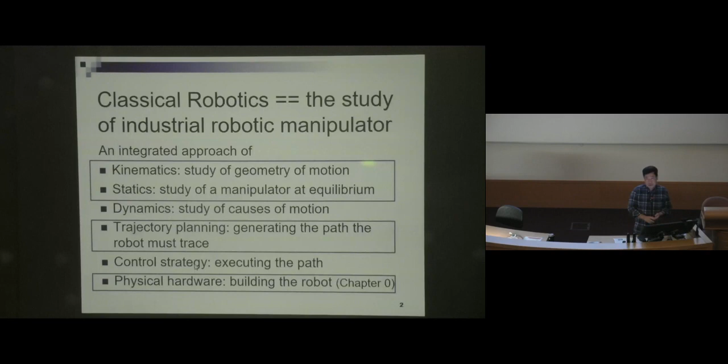So advanced robotics is essentially a theoretical analytic course, so I'm expecting you guys to have some background knowledge. Previously we expected students to have taken linear systems, but we don't think that's necessary since not everything covered there is applicable here. But you should be comfortable with linear algebra.

On our first lecture I have some slides going through a quick review of linear algebra, and there's also a PDF called Linear Algebra Review that covers some of it. You should be comfortable with linear algebra, and by now everybody should have gone through slides 66 to 76 of chapter 0, as well as the linear algebra review.

You should know trigonometry - the cosine rule, sine, cosine, and all that stuff. You should know it. We have this Trigonometry Identity PDF - it's just one sheet of paper, so it doesn't actually require you to know that many identities.

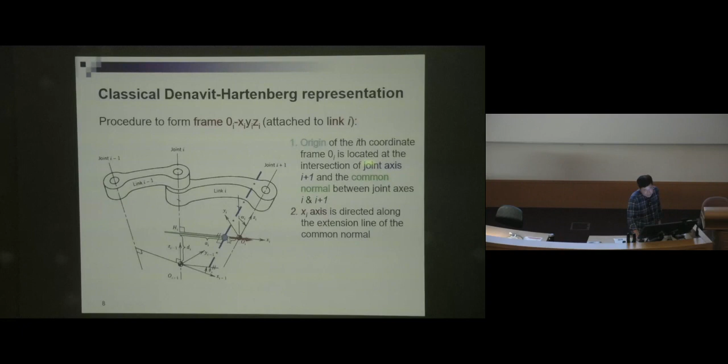And then after that, you need to determine the XI axis. The XI axis is directed along the extension line of the common normal. So this is the extension line of the common normal, so you have your XI. And then after that, you have your ZI. This is what is described as the classical DH representation.

So when you have the XI and ZI, you can find the YI because of the right-hand coordinate system. The Y-axis is chosen such that they form a right-hand coordinate frame. So from X to Y, you will have your Z being pointed out in this manner. So you attach the frame.

Then after that, there are essentially 4 parameters to determine the relative location of the frame. You have the angle between the XI minus 1 axis and the common normal, HI OI, measured about the ZI minus 1 axis using the right-hand rule — this is your theta I. Then you have the distance between the origin OI minus 1 and point HI. Then you have the length of the common normal. And finally, you have alpha I, which is the angle between joint axis I and the Z axis, measured using the right-hand rule. So you have these 4 parameters.

So if I'm to summarize this into a set of rules, I'll illustrate it using an example. I'll take out this nice drawing of the link, and we'll only look at the skeleton. So this is frame OI minus 1, this is frame OI, and you can actually see that there's an intermediate frame over here.

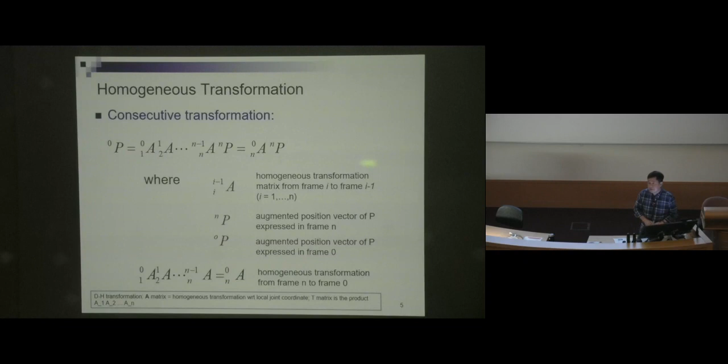Why do we have this modified DH parameter? What's the difference? Is any one better than the others? How does it work? The notation is also different.

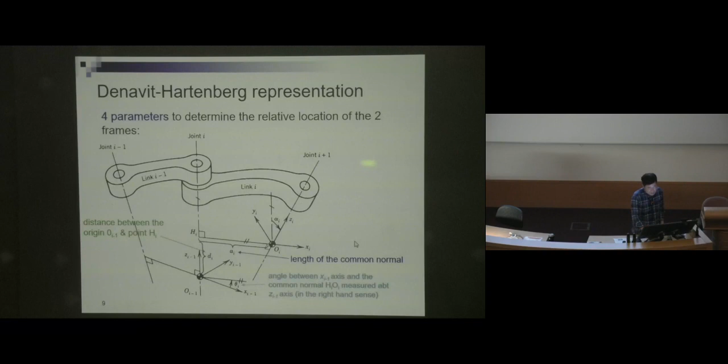For the modified DH notation, it basically goes from your link I to link I minus 1 to link I plus 1. So it's a variant of the classical DH notation. To say which one is better, which one is...

not as good, I guess both have advantages and disadvantages. Classical DH notation will be better if you're actually doing the classical analysis. So this is why you should know both.

Besides the classical DH notation and modified DH notation, there are other variants of the DH representation as well.

I thought it's more like two systems, but which one is more commonly used than the modified DH? So which one is more commonly used today? Both are equally used. Thank you for that. Yeah, both are equally commonly used.

So of course, the textbook is actually pretty popular, so modified DH notation is actually being taught in undergrad robotics class more. The classical DH notation is more for advanced classes, because in advanced classes we also tend to fall back to more analytical analysis.

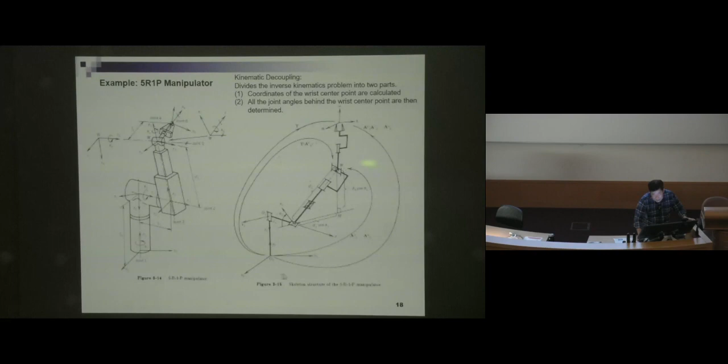We've gone through this in class with a different example. So we identify a wrist, and find the coordinates of the wrist center point. You calculate from here to here. Then after that, you find all the joint angles behind the wrist center point, meaning you take this as a center, use it to determine this, and then determine this. So we break them into two problems and isolate them, rather than isolating all 6 degrees of freedom altogether.

So the kinematic decoupling is easier. It simplifies the problem, but it doesn't apply to all the manipulator.

Okay. Sorry? This is for you to find out. Yeah.

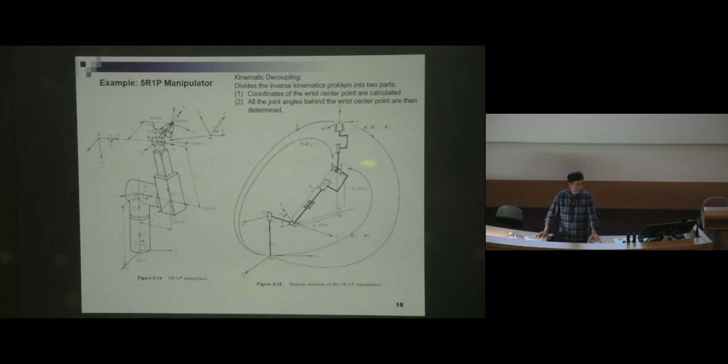Okay, so after that, after we go through the inverse kinematics, we went on to study the differential. And the main thing, one important thing we actually need to know is the manipulator Jacobian. So the manipulator Jacobian, we have gone beyond looking at the position and orientation of the end effector and the joint. We want to study the relationship of the velocity, the velocity at the end effector with the velocity at the joint.

So same thing, you have to start from the forward kinematics. And then we actually derive that when we compute this manipulator Jacobian, we actually assume a very small movement. So this is the infinitesimal end effector translation and the infinitesimal end effector rotation. So you have your dP equal to dXe, d phi e.

So you can write this as P dot equal to Ve, omega E. This refers to the end effector, the end effector velocity. And then the Q dot over here is actually referring to your joint velocity. So you have your Q1 dot, Q2 dot, up to Qn dot, every one representing one single joint, the velocity of one single joint. So the manipulator Jacobian will actually link the P dot equal to J Q dot.

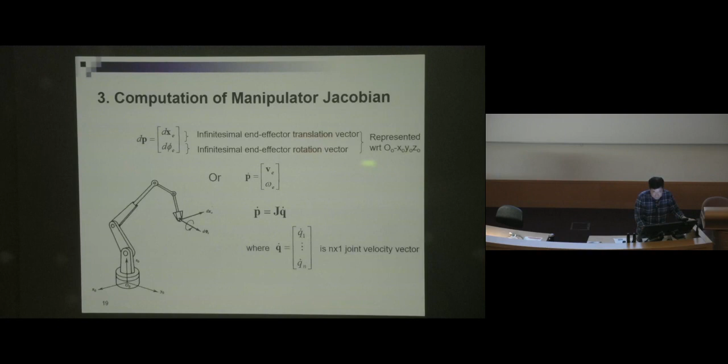So what does this manipulator Jacobian actually contribute, what does it actually comprise of? So the manipulator Jacobian will comprise of 3 rows representing the JLi, and 3 rows representing, the bottom 3 rows representing JAi. And every column itself is representing one single joint. So meaning that you have 6 by n, the Jacobian matrix is a 6 by n matrix.

And then if the joint happens to be a prismatic joint, the JLi, JAi will be equal to Bi minus 1, 0. It's a prismatic joint, so there will not be any rotation, you don't have any torque. And then if it happens to be a revolute joint, your JLi will be equal to Bi minus 1 cross Ri minus 1 E, and the JAi is equal to Bi minus 1.

So bear in mind that the Jacobian is configuration dependent, so the configuration of the robot actually plays a part. You look at, we continue with the RR manipulator.

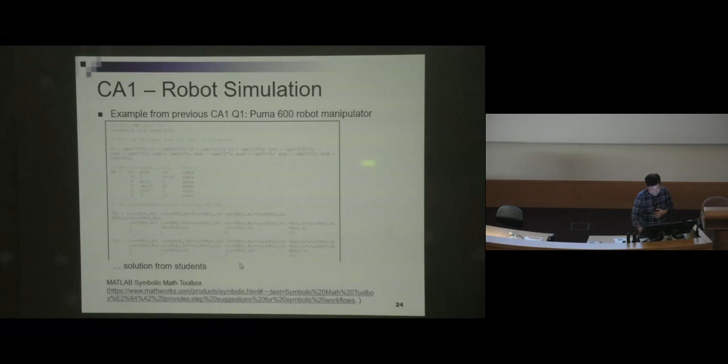This is actually a practice of what you have learned. You can actually read up on the symbolic math toolbox from here. The toolbox is actually available to you.

And then come the inverse kinematics. You need to do the inverse kinematics as well. So the inverse kinematic, you will start from the home position of the robot. You should know what is the home position of the robot, meaning that is the start position of the robot. Your question already gives you the start position of the robot.

And then you specify the point to reach. So in this case, the student specified this point to reach, and then this is the transformation matrix 0T6 to reach that particular point.

And then with that same thing, obviously you can see from this robot that you can actually consider a wrist, so you can actually perform the decoupling. So the student does the decoupling, solves the set of mathematics, and then determines all the joint angles.

So you need to do that. The previous CA also has a question three.

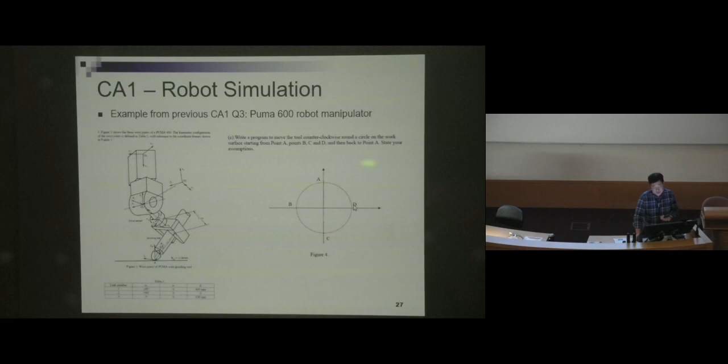So same thing — if you want to draw a circle, you probably need some waypoints, so you have your A, B, C, and D. For every point, you need to determine using the inverse kinematics. After you have determined the inverse kinematics of this point, you need to generate the trajectory to link them up together. Bear in mind that you actually need to reach the point and coordinate the motions.

So this is what the student did — they identified the coordinates of A, B, C, and D, performed the inverse kinematics for every point, and then generated the trajectory between the points. We'll talk about how the trajectory can be generated in a later part of this class.

So today is the last class, so I have to finish all these things. If I'm going too fast, please let me know.

So this is the result of the student. They specified the four points and tried to draw the circle, but it doesn't really work — it's not really a horizontal circle, so there are some problems here and there. It's actually because of the configuration of the robot, since it's fixed on the ceiling, and the ground itself has a certain length, a certain height, so it places a certain constraint.

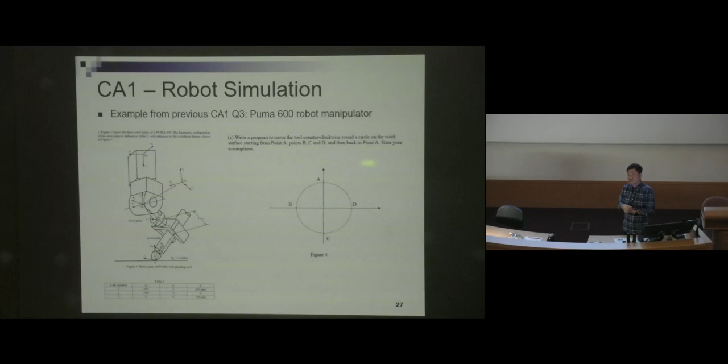So in your case, you shouldn't have this problem. You should draw the four letters, and do a plot like that. You should also plot the velocity, the angle — so this is the angle of joint one.

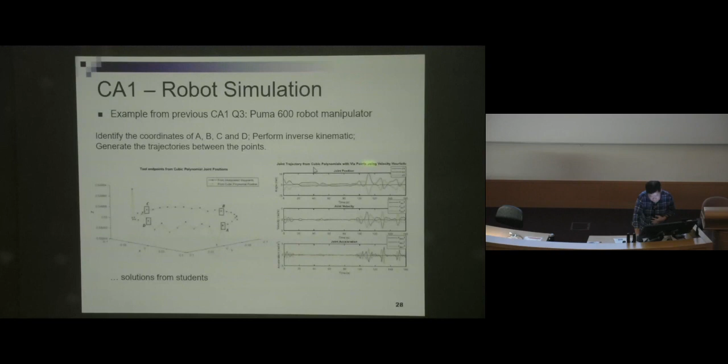Using this, the student implemented a cubic polynomial function that we will go to afterward. And this is the angle, this is the velocity, this is the acceleration of the specific joint.

So this is what I'm expecting from you guys for the CA. Can everyone start on the project now?

No, it's actually a reflection, an application of all that you have learned. I still have two more topics to actually go through.

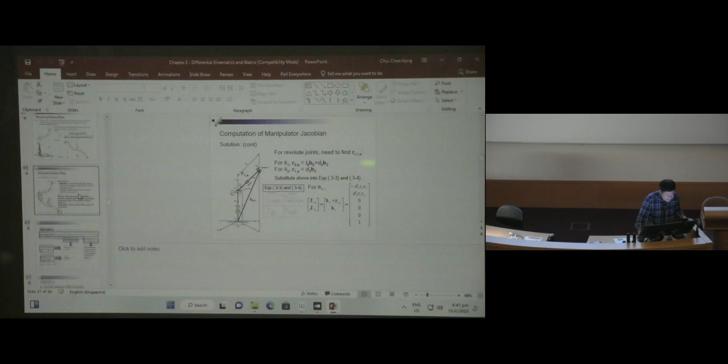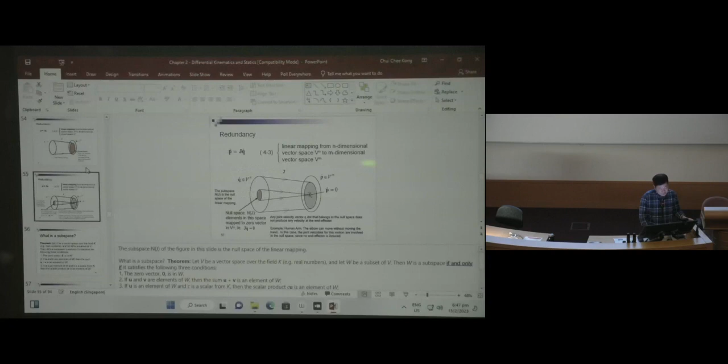So that basically sums up all that I want you guys to know, all the basic things. There are actually quite a lot of things like redundancy, mapping, and so on—theoretical things that are good to know if you actually do robotics, if you decide to pursue research in classical robotics. These are some mathematics that you probably should know.

Okay, so now we actually move on to statics. We have gone through, I talked about the Jacobian matrix—essentially the entire chapter 2 is about the manipulator Jacobian matrix. We said that the Jacobian matrix can relate the force, the velocity of the joint with the velocity of the end effector. Now we move on to look at how the Jacobian is going to relate the end effector force with the joint torque.

This has practical meaning. For example, this planar robot here is operating on a surface, applying a force on the surface. Assume everything is at equilibrium—when we say at rest, we refer to a state of equilibrium. So you have your F equal to Fx, Fy, representing the force at the end effector. You want to relate the force at this end effector with the joint force. With the joint—the joint can be a revolute joint, and the revolute joints will comprise of both force as well as torque.

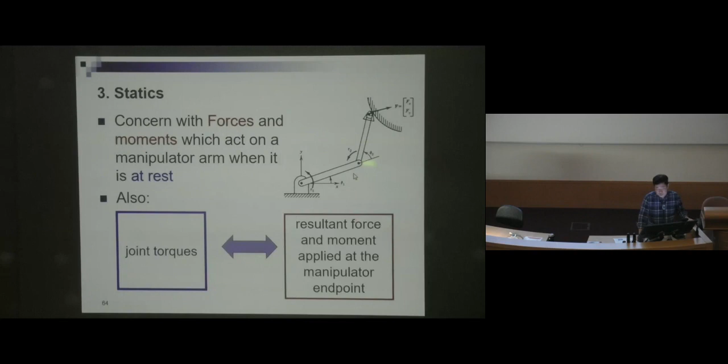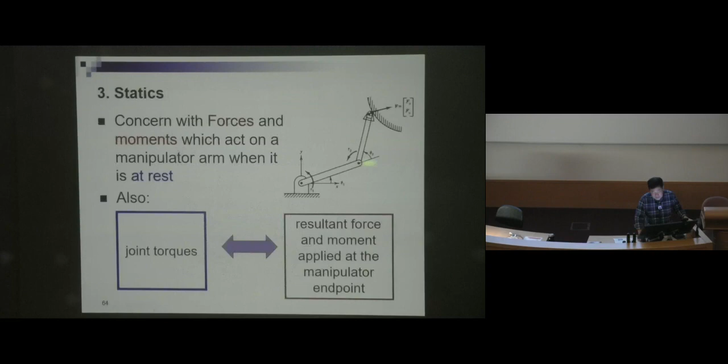So essentially, eventually we want to establish the relationship between the joint torque and the resultant force and moment applied at the end effector endpoint. First we see how we can derive the basic equation that governs this statics behavior. It's a static behavior because we're assuming an equilibrium position, equilibrium configuration.

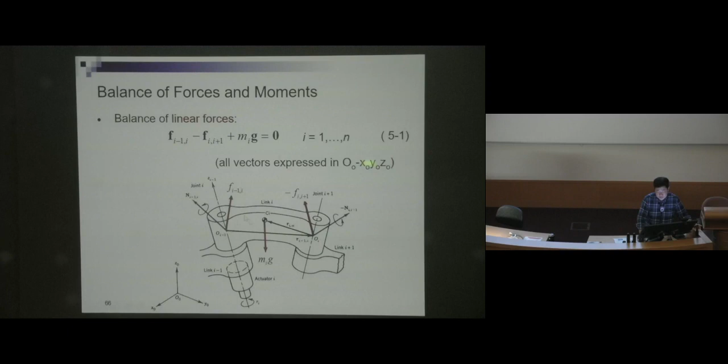Next, we look at the balance of the moment. A moment is essentially equal to distance multiplied by force—for example, if I have a pivot point, this is a bar, and if I have a force pointing down, this is the distance. The force times distance gives me the moment. The moment and torque are essentially very much the same, but a lot of the time we refer to something as torque because there's a rotation angle involved.

Okay, so in this context, they are essentially the same. So we have to look at the balance of moment about this centroid Ci.

When we look at this balance of moment, you have this Ni minus 1I, and then you have this counter force, reactional force, which is minus Ni plus 1. So we know that the moment is also due to the distance multiplied by the force, the linear force applied at the end.

So your Fi minus 1 will contribute a moment. You need to determine the distance r. For example, this distance r will be equal to your Ri minus 1I plus Ri Ci. This plus this will give you this vector.

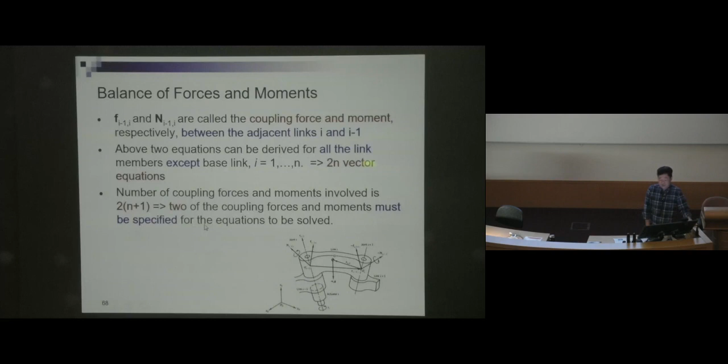So we look at how we are going to solve this. We are going to determine this force and moment. So the end force and moment, we specify using a capital F. This capital F is a vector that comprises of Fn n plus 1 and Nn n plus 1.

So the Fn n plus 1 is the linear force, Fn n plus 1. And then you have this, your torque or moment, which is Nn n plus 1. So if you look at the end-effector force, it's actually a 6x1 force vector. This capital F is a 6x1 end-point force vector.

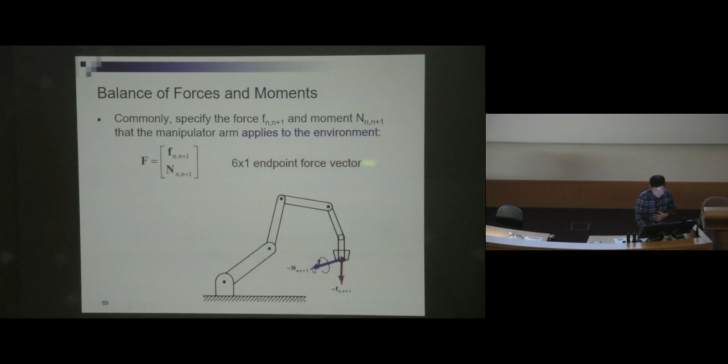After you have specified this, you want to determine the relationship between the input torque exerted by the actuator and the resultant end-point force. In this case, instead of saying moment, we put torque because it's an actuator, so it's going to have a rotation angle. We tend to use the word torque in this case.

So you assume that every joint is driven by an individual actuator that exerts a drive torque or force tau I between the adjacent link, and you assume the joint mechanism is frictionless. So it's an ideal situation, there are no frictions.

So for the prismatic joint, the tau I will be a linear force exerted along the I joint axis. There's only a single degree of movement, so you have this linear force and this moment along the joint. The tau I is essentially a dot of the bi minus 1, which is along the turning axis, with the linear force. The bi minus 1 is a unit vector pointing along the I joint axis. So this is for the prismatic joint.

And then after that, for the revolute joint, you can see that if you have a vector A transpose multiplied by B, you are essentially doing a dot product. So for the revolute joint, you have the tau I to balance the coupling moment Ni minus 1. Your tau I is equal to your Bi minus 1 transpose and Ni minus 1I. So Bi is again along the joint axis.

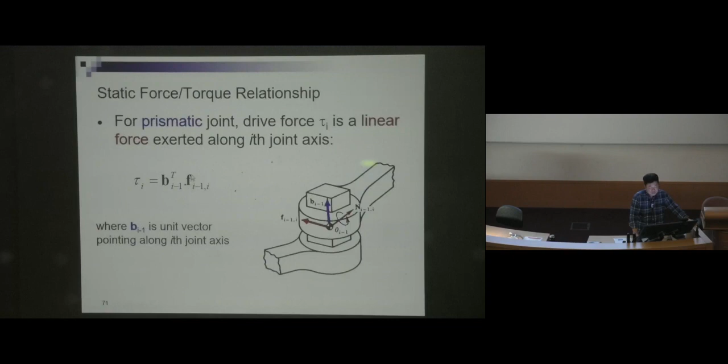So you have two different tau: one tau I based on the prismatic joint, and another tau I equal to Bi minus 1 transpose dot Ni minus 1I if it's a revolute joint. So they are essentially different - a prismatic joint only has a linear force, and the revolute joint has this moment.

So we state the theorem that if the joint mechanisms are frictionless, so everything is smooth, the joint torque tau required, also known as the equivalent joint torque, corresponding to the end-point force F, will be given by tau equal to J transpose F. This is the Jacobian matrix that we derived earlier last week, but it's the transpose of the Jacobian matrix.

We stated the theorem before but we need to prove that this relationship is going to be true. The Jacobian matrix is a 6 by n manipulator Jacobian matrix, so there are six rows, and every column corresponds to a joint. The Jacobian matrix relates the very small joint displacement dq to the very small end-effector displacement dp, so dp equals J dq.

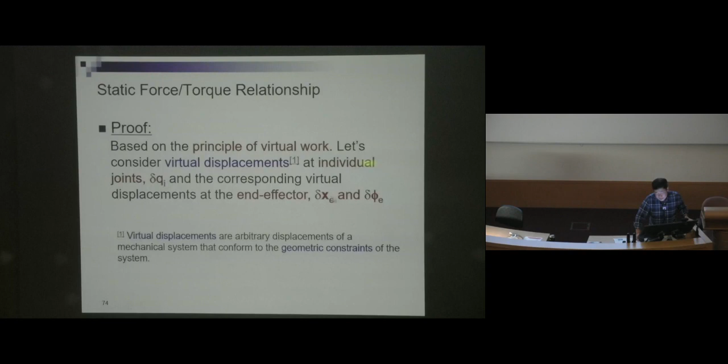We are going to prove this using the principle of virtual work. When we talk about virtual work, that implies a virtual displacement, a virtual displacement at the individual joint. So we have delta qi, and the corresponding virtual displacement at the end-effector, delta xe and delta phi e. These deltas are all very small displacements - they are virtual displacements, not actual displacements, because they conform only to the geometrical constraint of the system and obey no other rules, no other physics rule.

The virtual work will be equal to tau 1 multiplied by delta q1, and tau 2 multiplied by delta q2, and so on. This contributes part of it, and then at equilibrium, the virtual work done delta W will be equal to 0, meaning the work done at every joint will equal the work done at the end-effector. The work done at the end-effector will equal Fn+1 transpose delta xe minus nn+1 transpose delta phi e - this is from the end-effector, this is from the joint. At equilibrium, the virtual work done will be equal to 0.

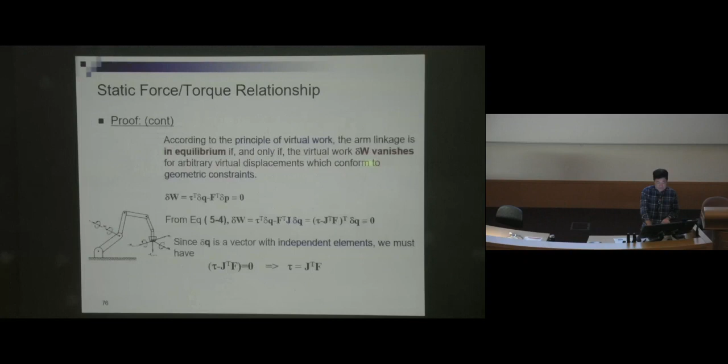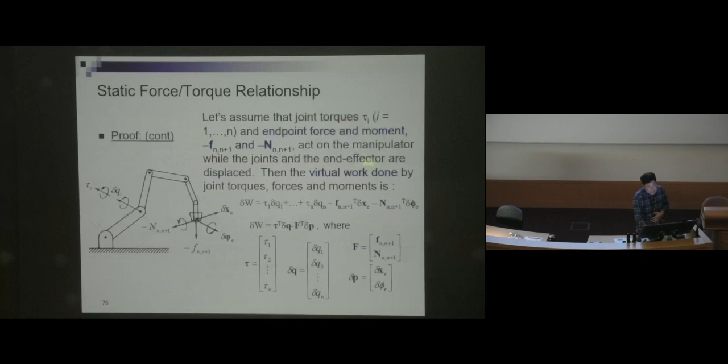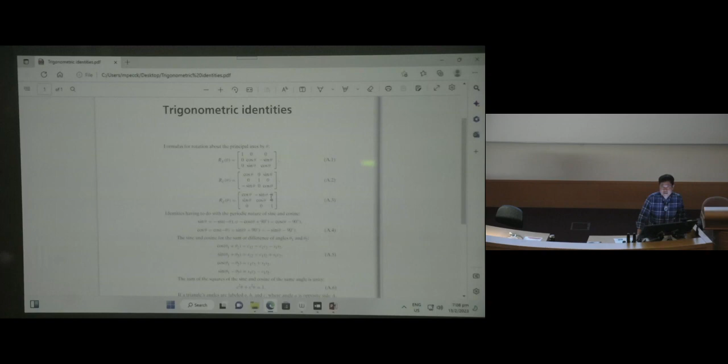So all that you need is only this single sheet of trigonometric identity. You don't have to remember it for the exam. It's open book, just one sheet of paper.

So all that you need to know is the Jacobian matrix.

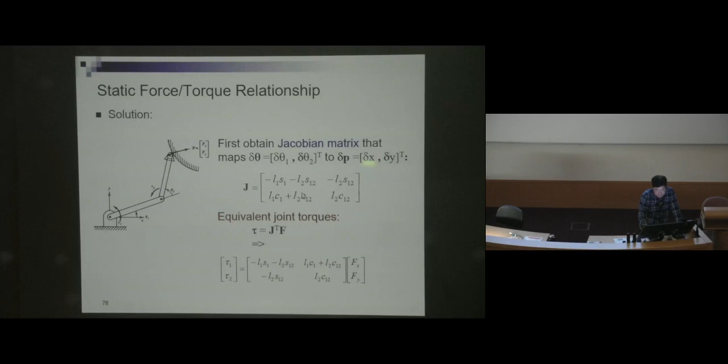There will be a situation when your theta 1 is actually equal to 0 and theta 2 is equal to 0. So when theta 1 is equal to 0 and theta 2 is equal to 0, meaning for example in this case, your arm is fully extended. So it's mentioned that when your arm is fully extended, you have a singularity condition.

So if you substitute theta 1 equal to 0 and theta 2 equal to 0 into these equations, you will find that tau 1, tau 2 is equal to 0, L1 plus L2, 0, L2 multiplied by Fx, Fy. So tau 1 is equal to L1 plus L2 times Fy, and tau 2 is equal to L2 times Fy.

So if you look at this tau, you can actually find that Fx is not present. So meaning that anything in the Fx, the linear force direction along the x-axis, has no torque. So Fx does not require any torque when you have a situation where your arm is fully extended.

We mentioned last week that when your arm is fully extended in this manner, you have a singular condition.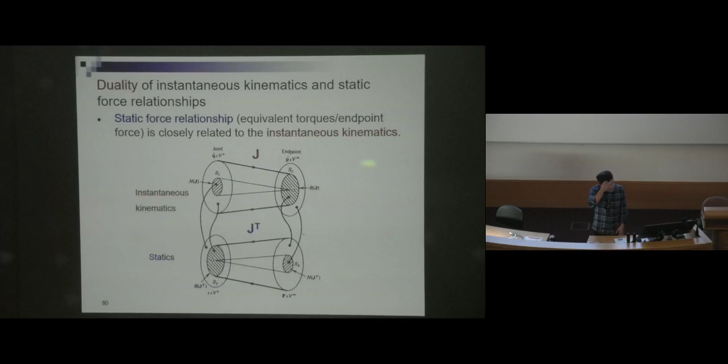It just came to my mind that tonight is the eve of Valentine's Day. Yeah, so, okay, well, okay, so we move on. We move on.

We move on to examine the duality of the instantaneous kinematics and the statics force relationship. We have gone through this before last week, and we have come to the mapping on the top of this figure.

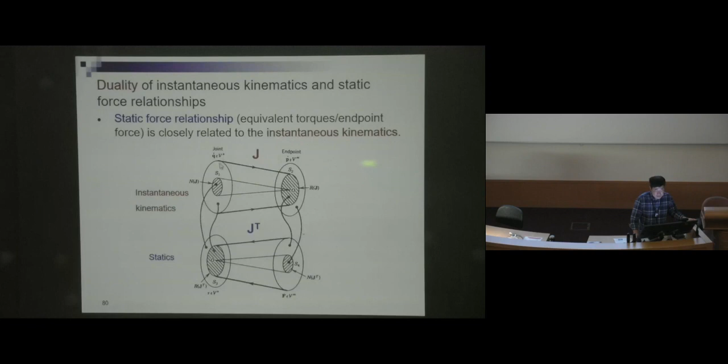This mapping actually represents the instantaneous kinematics. So we have your joint space, joint velocity space, which is your joint q dot, which belongs to your Vn - the n here refers to the number of joints - mapped to the endpoint velocity. The endpoint velocity is represented as p dot, belonging to Vm. So they are mapped; we can map the joint space with the endpoint velocity space via this Jacobian matrix. This J will map this to this.

So for every joint velocity, you map to this particular space, which is called Rj. So the duality means we're going to look at how this Jacobian, the transpose of the Jacobian, can be used to describe the static force relationship.

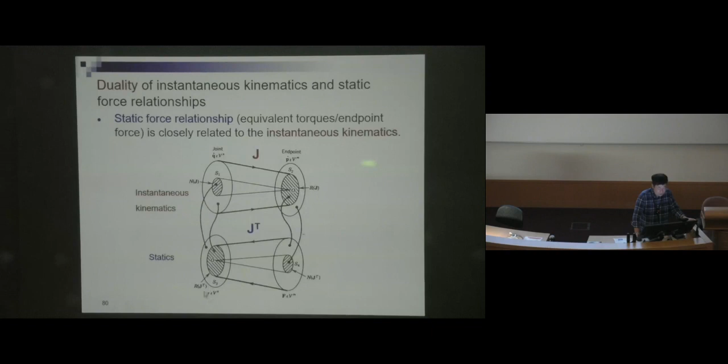So for the static force relationship, we are now looking at the mapping of the end effector endpoint force, the capital F, which belongs to Vm, mapped onto the joint torque, which belongs to Vn.

So from last week's lecture, we know that for the linear mapping of the instantaneous kinematics, there's a range space Rj. The Rj stands for the set of all possible end effector velocities generated by the joint motion. Bear in mind that for the instantaneous kinematics, the mapping is from the joint space to the end effector space, so from here to here.

So this is the range space Rj. When the Jacobian matrix degenerates, meaning the arm configuration is singular - for example, if I extend the full arm, this is a situation of singularity - the range space will not be able to span the whole vector space Vm. So you actually see the empty space, and there will be a direction in which the end effector cannot move.

So your p dot is equal to zero when the end effector cannot move, meaning your velocity is equal to zero, and at this particular point it will correspond to this space.

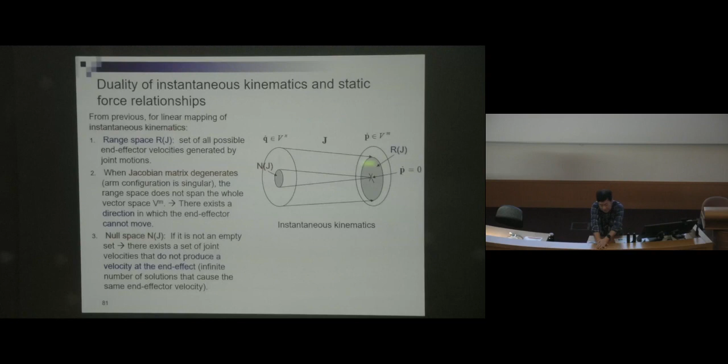For the mapping of the statics, shown at the bottom, we have something similar, but the mapping is in the other direction - from the m-dimensional vector space Vm, associated with the end effector, to the n-dimensional vector space associated with the joint. So you can see the reverse mapping.

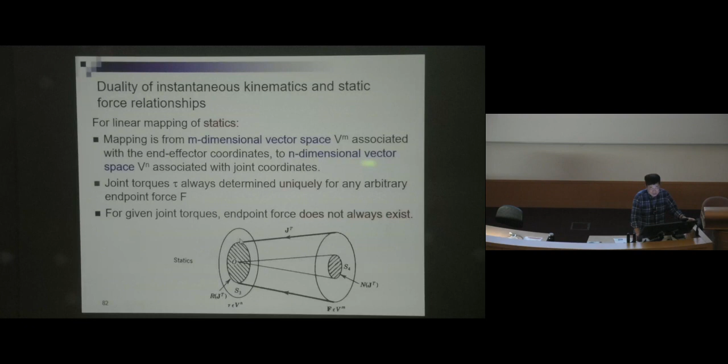So the joint torque can always be determined uniquely for any arbitrary endpoint force F, meaning the torque can always be determined, or from all of these we're able to map onto a space here. But if I have a given joint torque, the endpoint force does not always exist - there's a certain set of joint torques for which there isn't an endpoint force.

This endpoint force is actually known as the null space J transpose. It represents the set of all endpoint forces that do not require any torque at the joint to bear the corresponding load. I went through an example earlier where we have a full arm extended, and one force F doesn't require any joint force. So the endpoint force is borne entirely by the structure of the arm linkage.

With this, you actually link to the topic of compliance and stiffness of the manipulator. Because of time constraints, we are not going to go through this in this module.

You have your range space R j transpose, representing the set of all possible joint torques that can balance the endpoint force. So you have this null space N(J), and this N(J transpose) that represents the null space relating to a certain range space R(J transpose).

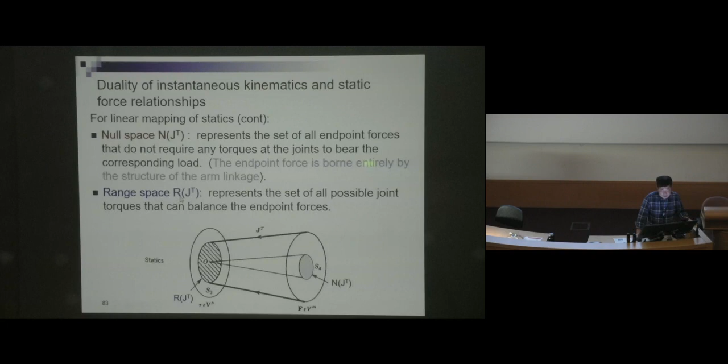If we combine the two things together, we can find some interesting linkage. The null space N(J) is complement to the range space R(J transpose) — they are orthogonal complements. Meaning that if I have a non-zero vector x in N(J), it cannot also belong to R(J transpose), and vice versa.

The blue color here indicates the direction in which the joint velocity does not cause any end-effector velocity, and the joint torque cannot be balanced with any endpoint force. This is represented by the blue line.

The range space R(J) will be orthogonal complement to N(J transpose), represented by the red line. So no joint torques are required to balance the endpoint force when the external force acts in a direction in which the end-effector cannot move by the motion of the arm joint. So you have this duality of relationships.

The study of the duality of this relationship will come in handy if you want to study a compliant mechanism.

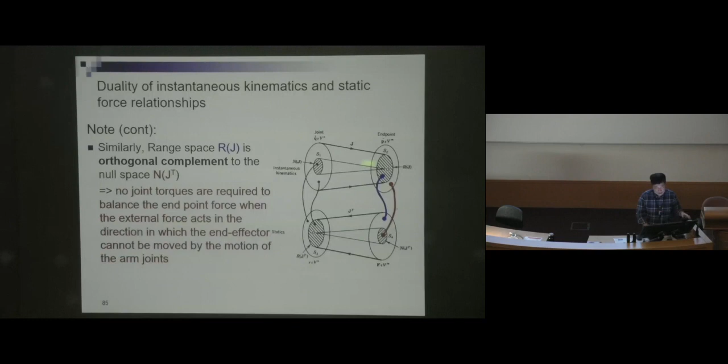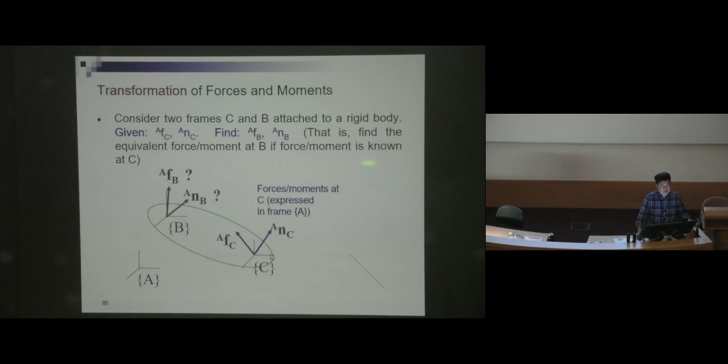This is important because often you have your tools, and your force and torque sensors are present at C. You have tools making contact with the surface you're acting on, and your sensor is on the end effector. So at the end effector you have your force sensor reading, but your primary interest is the force actually in contact with the surface, because you don't want to break the surface — you want to know the force acting on the surface you're dealing with.

So how do we determine that? Same thing — we look at the reaction force and moment applied at B under equilibrium, so we do the free body diagram.

We introduce AFR, which is the reaction force — R stands for reaction force. The reaction force is equal to minus FAB, and ANR is equal to minus ANB. So this is the reactional force and moment at B under equilibrium, and they should be balanced.

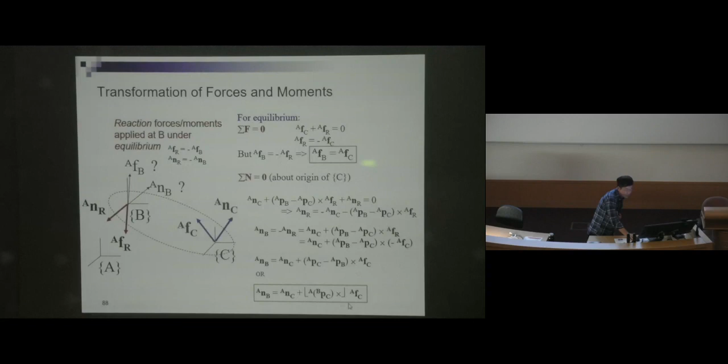This is a skew-symmetric matrix that we taught in section 1 of chapter 2. In matrix form, if you sum it up, AFB is essentially equal to AFC. You can write them in matrix form in this manner.

In a typical application, we would like to relate C with B, because you are actually relating with the base frame. But your sensor is with C, and your interaction force is with B. So you want to relate this with the sensor force, so you cannot stop here, you need to move on.

So basically you multiply the matrix and then you have the C, and the C and C cancel off. So this is, you have your AFC, and the C and C cancel off, you have the ANC.

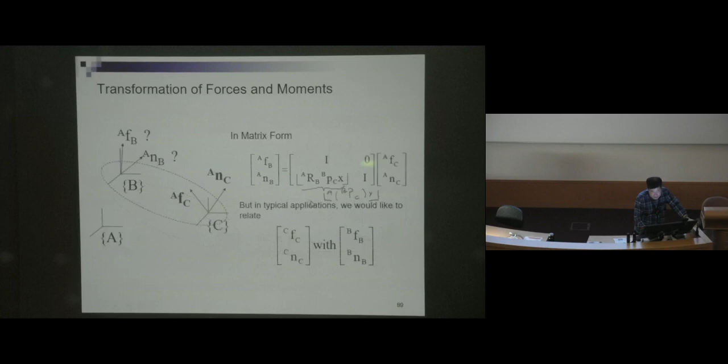So you substitute this into these equations, into here, you end up with this. You do the multiplication itself, and you finally end up with this matrix.

You also know that BFB is equal to your BAR AFB. Same thing, you can visualize that, you can cancel off this A, so this is essentially your BFB. And BNB is equal to your BAR ANB, the A and A cancel off, this is your BMB.

So you can also express the BFB, BMB in this form. So with that, you end up with these equations.

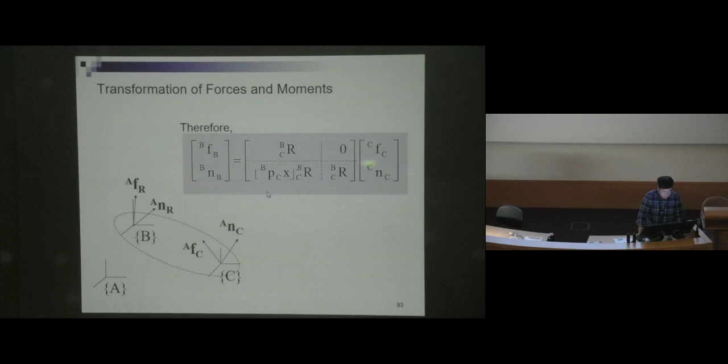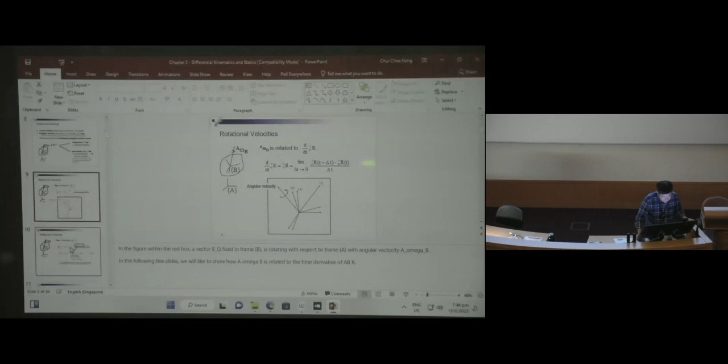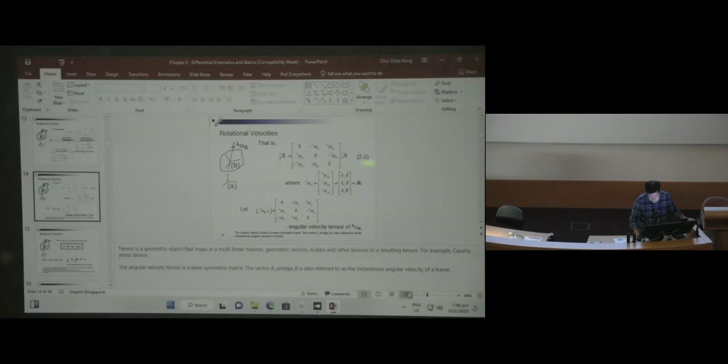So this is a skew-symmetric matrix that we talked about earlier. I'll upload a slide with the composition of this matrix. It's a skew-symmetric matrix. Basically this is this matrix. Over here you have your P instead of the omega. So this is the same as this one. Your skew-symmetric matrix multiplied by BCR.

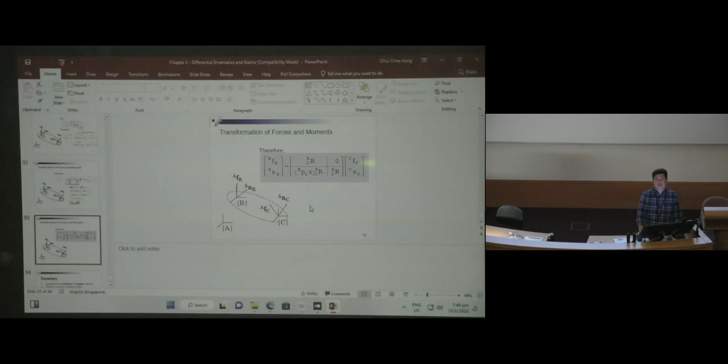So in summary, we have studied the expression for translation and angular velocity, so it transforms the velocity in different space. That was session 1. Then we talked about the computation of a Jacobian matrix that relates the joint velocity with the end effector velocity, which we used to solve the forward and inverse instantaneous kinematics. We want to understand the concept of robot singularity, and then study the static force and torque transformation between task space and joint space, and then the static force torque transformation between frames, such as the sensor frame and the tool frame.

We're not going to talk about the stiffness of a manipulator arm in detail, but you should know that when a force is applied at the end point of the arm, it will deflect by some amount depending on the stiffness of the arm and the applied force. This contributes to the study of compliance in robotics.

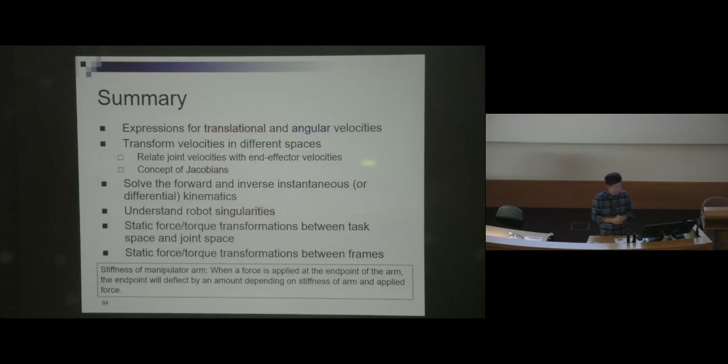Let's move to the last topics, the last chapter, which is a relatively smaller, shorter chapter.

It's about robot trajectory planning. When we talk about trajectory, we're essentially looking at the time history of the position, velocity, and acceleration of each degree of freedom. So we are looking at the joint space, since every degree of freedom corresponds to one joint. For example, a robot manipulator with 6 degrees of freedom has 6 joints. Every joint has a certain position, so if it's a revolute joint you have your theta, velocity theta dot, and acceleration theta dot dot.

What the user does is specify the desired goal position and orientation of the end effector, and then the system decides the trajectory. For example, if I'm going to draw a circle, I specify points A, B, C, and D, and the system should generate the trajectory for me from A to B and B to C, so A to B is one segment and B to C is another segment.

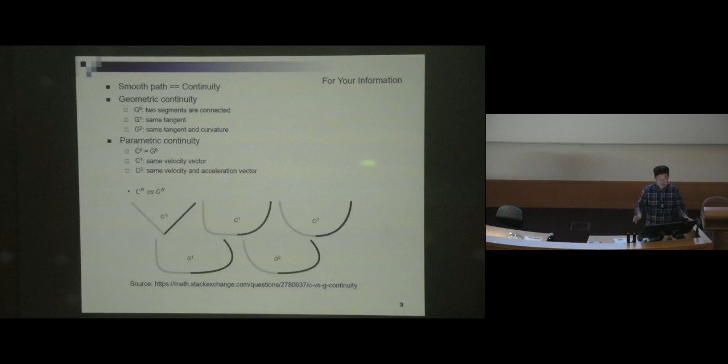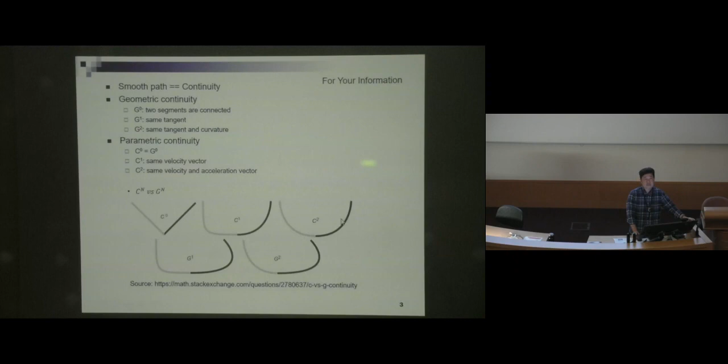But what matters most to us is parametric continuity. C0 continuity is the same as G0, meaning the two segments are connected. C1 continuity means both segments should have the same velocity vector. C2 continuity means the same velocity as well as the same acceleration vector. If I define the angular position as theta, the first derivative is theta dot, the velocity, and the second derivative is theta dot dot, the acceleration. So smooth path is related to the study of continuity in mathematics.

So the path shape is essentially described in terms of the function of joint angle.

So the via point will be located midway between the starting and stopping position of a robot tooltip. The tooltip must actually pass through it without stopping. Or you can actually define AB as one single segment, and then you are going to stop at A before you move on. So you need to identify the path point.

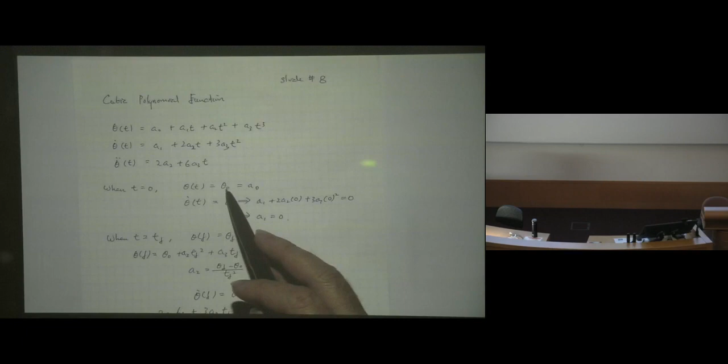So when t is equal to 0, your theta t is equal to, everything is 0 over here. So you know that your theta 0 is actually equal to your A0.

And then after that, you look at your theta dot t. So when t is equal to 0, your theta dot t is also equal to 0. Your theta dot t is a1 plus 2a2t plus 3a3t squared. So this is 0, this is 0. So you know that your a1 is actually equal to 0. So this is the first set of boundary conditions.

Two equations. And then when your t is equal to tf, your theta f is equal to theta tf. So your theta tf is equal to theta 0 plus a2 tf square plus a3 tf cube and so on. So you do the mathematics, you will know that your a2 is equal to theta f minus theta 0 divided by tf square minus a3 tf.

And then you also know that the other boundary condition is, at that point, your theta dot f is also equal to 0. So same thing, you have a3 equal to minus 2a2 divided by 3tf. So you put the 2 into 1, you will have your a2 equal to 3 times theta f minus theta 0, divided by tf square. And then once you have a2, you put it back into a3, you will find that a3 is equal to minus 2 divided by tf cubed, times theta f minus theta 0.

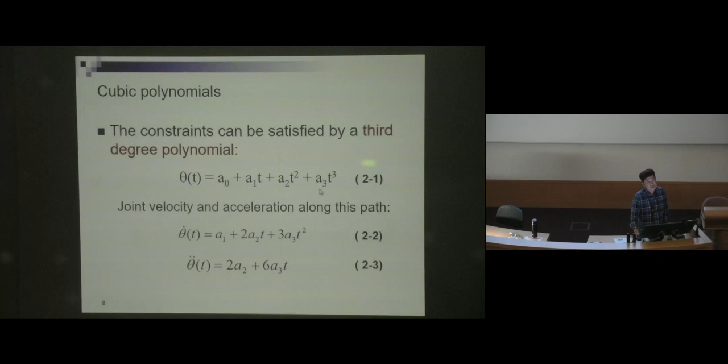Okay? So this is how you have determined the four parameters, the four constants for these equations.

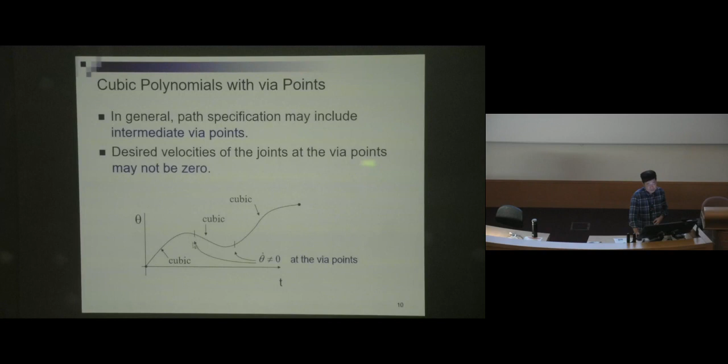So in some cases, the path specification may actually include an intermediate waypoint. The desired velocity of the joint at that point may not actually be equal to 0. So you have some constraint over here.

So you've used a cubic polynomial for each segment. So you know that your theta dot 0 is equal to theta 0 dot, your theta dot tf is equal to theta dot f. But the theta dot at the midpoint here need not actually be equal to 0.

So the waypoint meaning that your angle must actually pass through here. It's the theta that's actually passed through here. It doesn't actually mean that your end point will have to pass through here, because this is a plot of theta over t.

But a combination of your theta will actually ensure your end point reaches the waypoint that you actually want to reach.

So if you apply the position and velocity constraints at equations 2.1 and 2.2, you will be able to find A0, A1, A2, and A3 respectively.

So the question here is, how do we actually specify the joint velocity at this waypoint? So you need to specify the desired velocity at every waypoint. This is a waypoint, and then apply the inverse kinematics, inverse Jacobian.

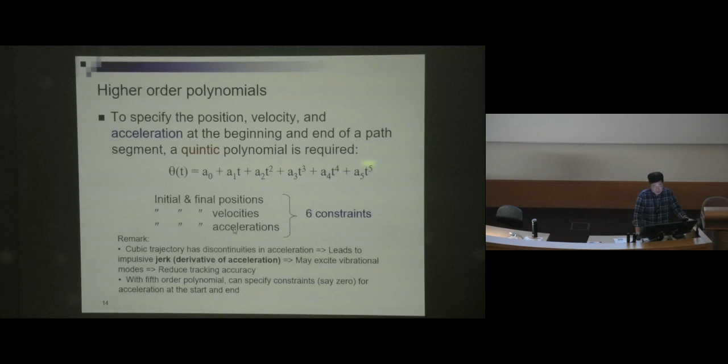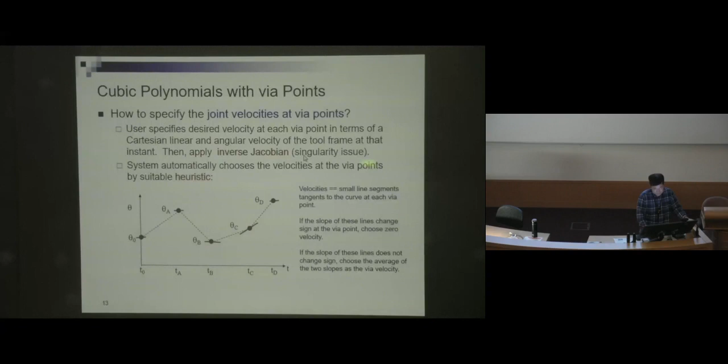So for the 5th order polynomial, you can specify the constraints, for example 0 for your acceleration at the start and end point. The higher order polynomial will be smoother compared to the cubic order - smoother motion. Previously you had the initial and final position and initial and final velocity. Now you have your initial and final acceleration as well. So altogether you have 6 equations and 6 unknowns, your a0 to a5. If you solve the math, you will be able to find these parameters.

Let's look at an example on cubic polynomial trajectory generation. This is a textbook example.

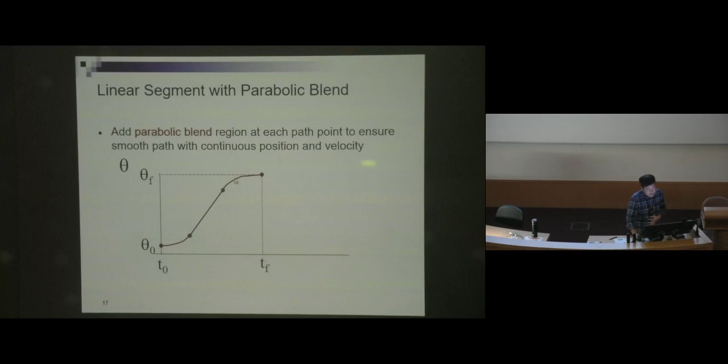So how do we actually determine this planning? You may consider a constant acceleration, meaning, for example, from T0 to T1. T1 is the start of your linear segment, and T2 is the end of your linear segment. When you have a linear segment, your velocity is constant.

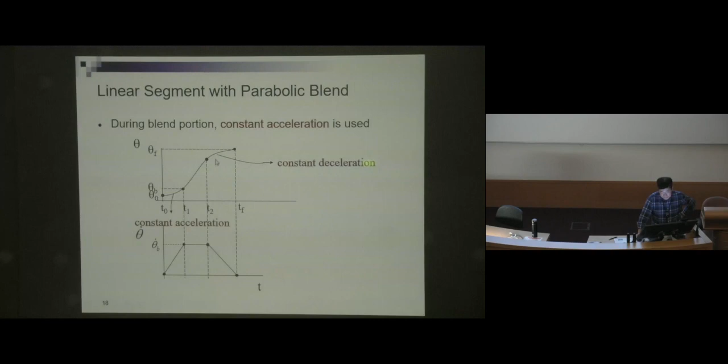And then the same thing, you want a constant deceleration. You assume that the constant acceleration and the constant deceleration have the same magnitude acceleration. That means you have the same rate of acceleration, but of course their signs are different - one is deceleration, one is acceleration.

So if you look at this graph, you know that T1 minus T0 is equal to Tf minus T2, which is equal to your Tb. So this is the same time, although the graph doesn't draw to scale.

So meaning that this acceleration time and the deceleration time are the same. You also indicate a halfway point mark position, which is your theta h. So at the halfway mark, which is th, your theta h is equal to theta at th, which is equal to half of theta f plus theta 0.

Th is half of Tf plus T0, so it's at the midpoint. At the midpoint, you take the initial point plus the end point divided by 2, so you get the midpoint.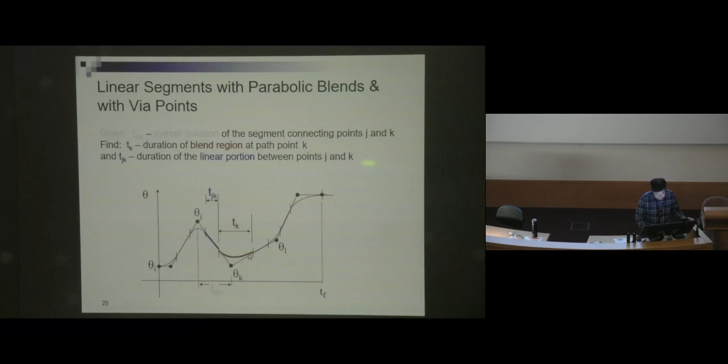So the speed at this linear portion is theta dot jk, from j to k. And theta double dot k is the acceleration at the blend point, assuming constant acceleration. The two lines indicate absolute value, without regard to sign. So if you're given all the path points, theta k, all the durations tdjk, and the magnitude of the acceleration theta double dot k, it's just a magnitude, so there's no sign. You don't know whether it's going to accelerate or decelerate.

So you want to calculate the blend time tk and the linear segment time tjk. If you know these two terms, you will be able to achieve the waypoint theta j and theta k.

So let's look at how the calculation will be, how the duration will be. For the interior point, from j to k, theta dot jk is equal to theta k minus theta j, divided by tdjk. So basically you take the two points, assume constant velocity, take this minus this, divide by the total time, and you get the velocity theta dot jk.

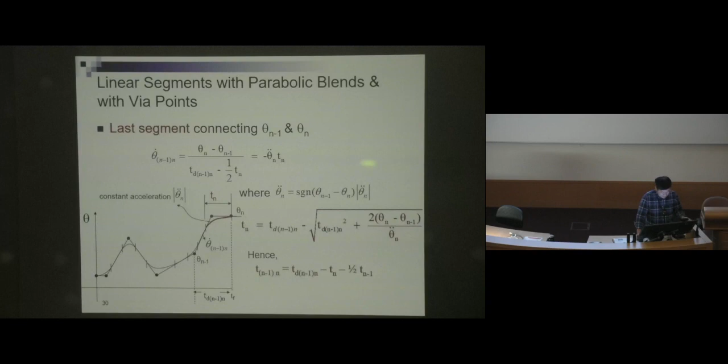We'll look at an example before I end this. Suppose the trajectory of a particular joint is specified as follows: 10 degrees, 35 degrees, 25 degrees, and 10 degrees. The duration of these three segments are 2, 1, and 3 seconds respectively - 2 seconds to travel from 10 to 35 degrees, 1 second from 35 to 25 degrees, and 3 seconds from 25 to 10 degrees.

The magnitude of the default acceleration at all blend points is 50 degrees per second squared. This is your acceleration at all the blend points. So you're supposed to calculate all the segment velocity, blend time, as well as the linear time.

After that, if you want to plot it, you can actually plot it nicely to visualize it. You have theta equal to 10 degrees, 35 degrees, 25 degrees, and 10 degrees.

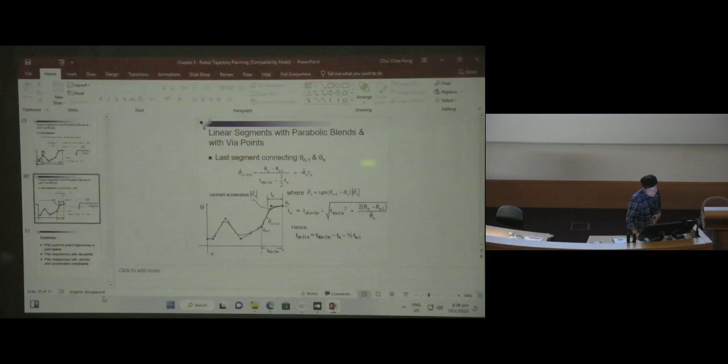So this is quite a short chapter. Basically you need to know that you can plan point-to-point trajectory in the joint space. The alternative to joint space is task space - there are pros and cons for joint space and task space. In our case we focus only on the joint space, and you can plan the trajectory via joint space.

So we basically go through two methods, via waypoints. One is polynomial functions - the polynomial trajectory functions comprise cubic as well as 5-degree polynomial functions. The higher degree polynomial function has an advantage to achieve a smoother function, but the problem is that a higher degree means it's more computationally intensive, so it costs more.

The other way is linear with parabolic blends, with the blend at the beginning and end point. All these methods can be done with waypoints. You can also plan trajectory with velocity and acceleration constraints, meaning the velocity and acceleration at a specific point can be specified, setting constraints on your trajectory planning and generation.